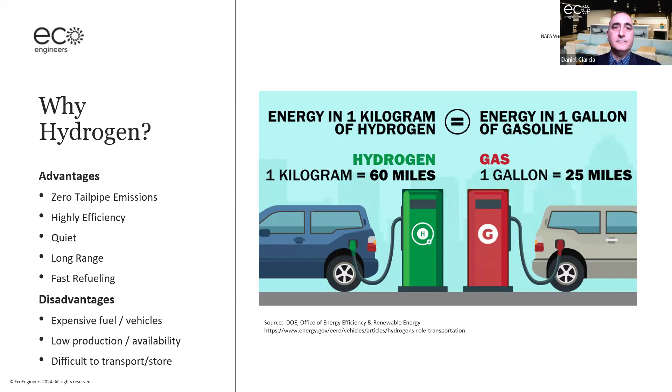So let's take a look at where we are today in the hydrogen market and where things are moving to. As you can see today, this is an NREL sourced chart, and the primary applications of hydrogen today are really for industrial uses, being used in petroleum refining and ammonia production. And those sources, frankly, how hydrogen is created today is quite dirty in most cases for these applications. Three-quarters of the hydrogen being produced today comes from fossil natural gas, and about a quarter of hydrogen today is produced from coal in a process called coal gasification.

So we want to look ahead at both the use of hydrogen as a clean vehicle source, but also how it's produced, because that's very important to solving the problems of climate change and emissions. Moving forward at the expected demand for hydrogen, the medium and heavy duty market will be the dominant consumer of hydrogen, as well as decarbonizing our natural gas pipeline by blending hydrogen into natural gas.

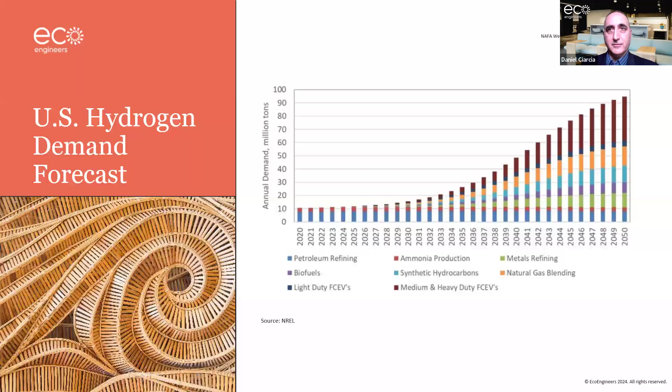But I'm using words like decarbonizing. How is hydrogen going to decarbonize these applications if they're made from very dirty sources today? That takes us to the topic of how do you measure the environmental footprint of this fuel and the production of this fuel. We know that using it is very clean, but how do we produce it in a clean way? You would first need to measure what that impact is of the hydrogen.

This is a process called a life cycle assessment, or life cycle analysis, or LCA for short. Essentially what an LCA does is it looks at all of the inputs to creating a fuel. What are those inputs of feedstocks? How are those feedstocks acquired? Are they grown? Are they harvested? Are they mined? How are they transported to a production facility where they get converted to the end fuel, which in this case is hydrogen?

And possibly are those byproducts being produced, and can those fuels be used within the system to clean up the actual production itself? So all of this is kind of within the boundary of what we would look at doing a life cycle assessment of producing hydrogen or any other fuel that needs to be measured.

At the end of the day, what we look at is to determine, in terms of greenhouse gas and climate change, the carbon emissions or the CI emissions of that fuel on a per unit of energy basis. So we're measuring how much emissions are emitted to produce a certain amount of energy in this process.

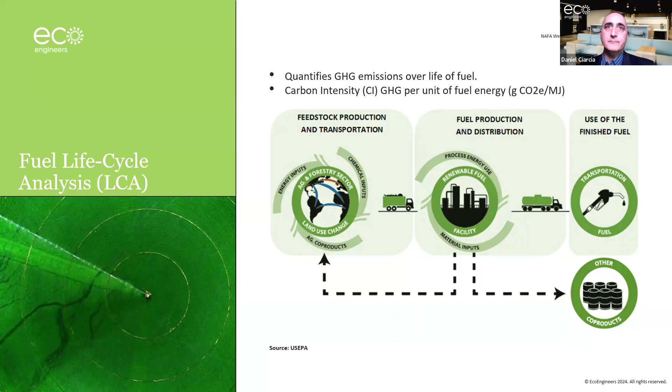Hydrogen today has kind of a high CI, or high carbon emitted model, a medium or medium-to-low model, and then a very low carbon intensity model. So that's where this concept of life cycle assessments really becomes important. It would be measuring these production facilities to determine how much carbon is actually emitted during the process of creating hydrogen.

The traditional and current method of producing hydrogen is pretty energy and resource intensive. This is the high carbon intensity model, where you're using a lot of energy to heat up methane in order to break the molecules and extract the hydrogen out of it. Methane is typically from fossil natural gas, and it is a process that requires a lot of energy and emits a lot of carbon in the process. So even though it's prevalent today, it's not the desired way of making hydrogen, and we can look towards improving that carbon intensity.

So the second model is to do essentially the same type of process, but to take any emissions that come off of that process and sequester those. Typically, sequestering means putting it underground in places where it will reside for at least 100 years. The hope here, of course, is that in 100 years, we will have solved climate change and it won't be a factor anymore. So this is a good intermediate step to cleaning the process of making hydrogen, or really any fuel type, by sequestering those greenhouse gas emissions underground.

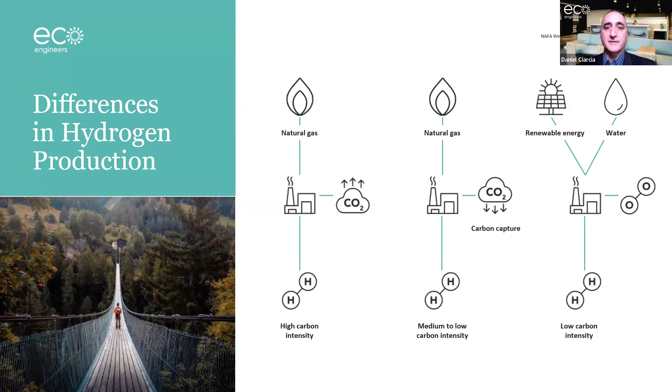Right now, there's a gap between what's available to do that clean hydrogen production and the demand that we expect to see for hydrogen. To close that gap, the Inflation Reduction Act that was passed, I guess a year and a half ago now, will address that production by providing tax incentives for those who are producing clean hydrogen. So you can see what these incentives look like based on the x-axis here, which is the carbon intensity.

Again, carbon intensity is derived from that life cycle assessment process. At EcoEngineers, we can support this process of analyzing a production facility to determine the carbon intensity. If it's low, the lowest bracket being less than 0.45 kilograms of emissions per kilogram of hydrogen, the maximum tax credit is available, and that's 60 cents per kilogram of hydrogen.

It tapers off pretty rapidly after that if you are higher than 0.45 in carbon emissions. You can see how it tapers off, and you can still get some incentives up until about 4 kilograms of CO2 per kilogram of hydrogen. The blue line there is a bonus that the IRA provides, basically a 5 times multiplier on that incentive program if certain conditions are met by the producer, such as prevailing wages and apprenticeship programs. So very compelling incentives available there.

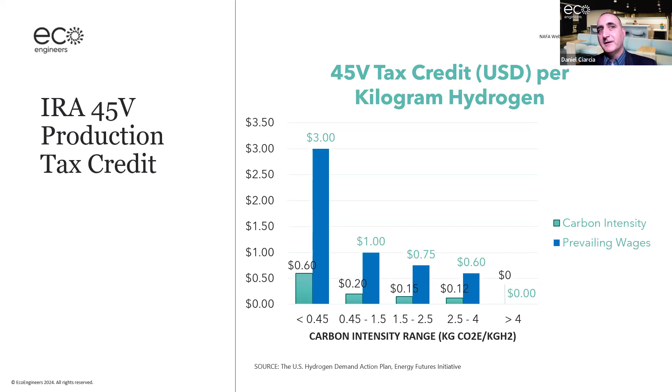With the last slide, I'll pull it all together to show how this can all be stacked to really provide a financial incentive for creating hydrogen in a clean way across the industry. This example shows an electrolysis plant that is using renewable energy, maybe from wind or solar, to provide electricity into the electrolysis process and create hydrogen that is used in vehicles.

Nationwide, through the Inflation Reduction Act, you would have the 45 credit available for production of the renewable electricity. You would also have the 45V available, which is a production tax credit for low carbon hydrogen, as shown in the previous slide. Those two incentives alone would probably be able to support about half the cost of making that hydrogen.

So that it really brings it within cost parity of our less desirable production methods today. In addition, some states, California shown here, have additional incentives available. California has an incentive for the hydrogen pump, having the hydrogen pump available, and also through a program called the Low Carbon Fuel Standard to dispense hydrogen in the state. These programs aren't necessarily restricted to California, but they are surely the most aggressive today across North America, although there are other regions with similar programs.

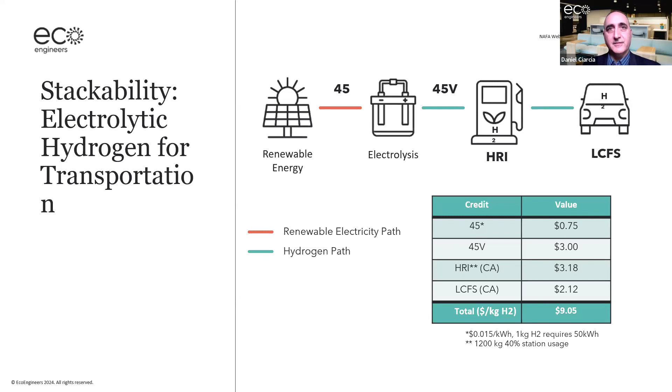So it is possible to stack all of these incentives and really offset the total cost of production for the cleanest of hydrogen sources. This will hopefully move the industry forward and really make the realization of having plentiful clean hydrogen available for vehicles in the short-term future.

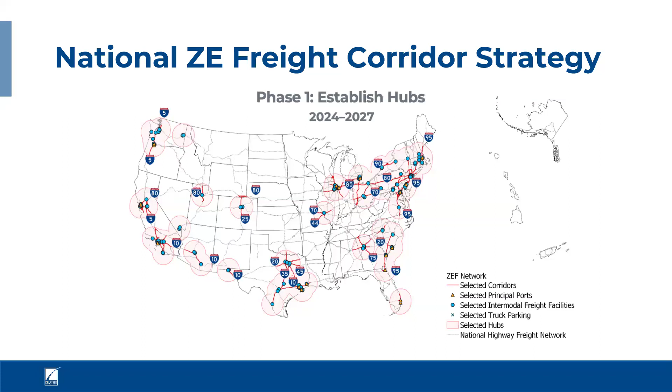The initial selection sites were based on states that already have policy in place, and places where there are already alternative fuel networks established. They also see ports as a key area for tying in, a great spot for initial adoption of ZEV technologies for medium and heavy duty, because it's already such a closed route—easier to get fueling in there, easier for pilot projects and to establish best practices. So all of our I-95 corridor is also tying into every port, and we're focused on every port between Georgia and the New York, New Jersey port.

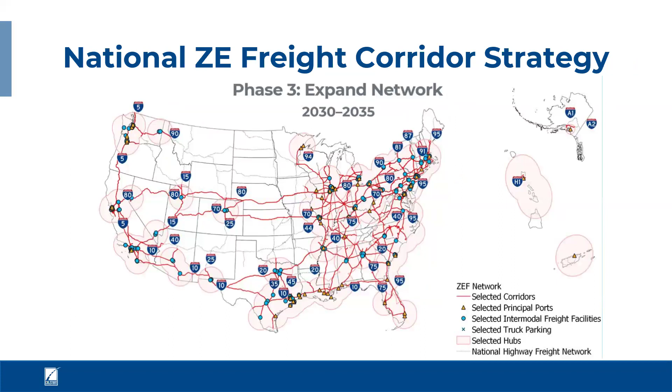So all of these are in the first phase and phase 2 level of what's drawn out here in the National Freight Corridor Strategy. This just goes on to show you how this planned expansion will look, for 2030 and 2035.

Next slide is the corridor as it's planned in its totality. So we've got a lot of inspirational work. Of course, this is not set in stone. Like I said, they plan to update this every year, and I'm quite sure there will be some iterations along the way and some best practices that wind up evolving. But it's exciting to see this begin its development.

So with the focus on the fact that the first wave of adoption will be in these hubs, and a lot of them will be focused at ports, I wanted to give some technology examples of what is available off-road, and hydrogen vehicles that are at ports.

So several of the key things that have been noted about battery electric vehicles, particularly at the ports, is that especially in the Southeast, there is an issue with temperature, particularly high temperatures. It gets rather hot down here and the range does not keep up. The batteries are not as efficient as they ought to be.

Also, over the course of the shift, ports are running continuously. Those vehicles really don't get much of a break, and the battery usage drops significantly over the course of a shift. And then you lose your payload over the course of the shift because the battery simply isn't able to operate as quickly and as efficiently as it was able to as it first came off the charger.

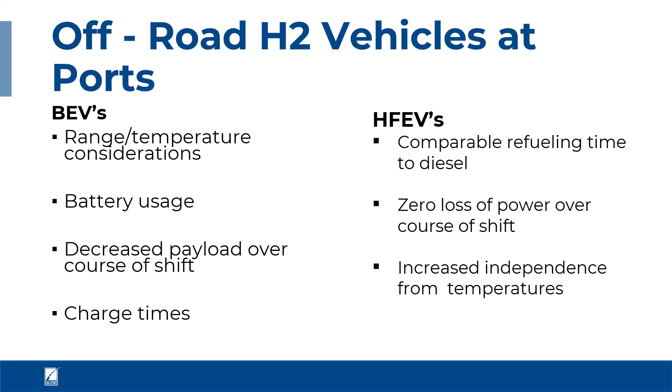One port that I've been particularly impressed with as far as looking at pilot demonstrations is the Port of Los Angeles. If you're looking at diving into this more, I highly suggest that you go to their website. There are a number of off-road trucks that are available in this space. However, a lot of them are currently being tested overseas, and I wanted to focus here on a few that were being tested right here in the US.

Port of LA happens to be doing a lot of testing. So I wanted to highlight this Nuvera Hyster handler. This is out of the Port of LA. Just want to give you an idea of the size of these shipping containers that are being used, and the length of the day and the temperatures that this thing is being used at. And it has great reviews, as you can see on their website.

Another is this Class 8 yard truck that was built by Capacity Trucks and utilizes Ballard Power Systems. Again, I highly encourage you, if you're interested in this technology, to go check out theirs.

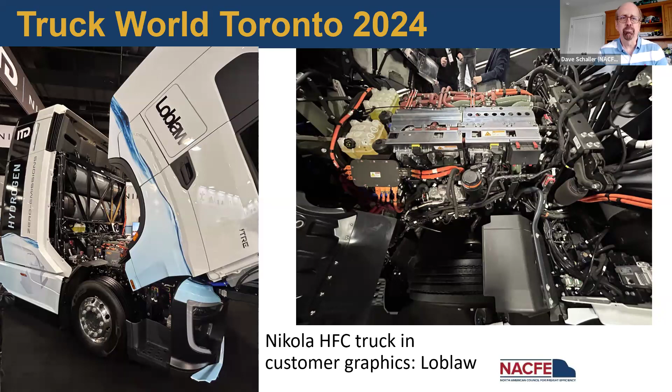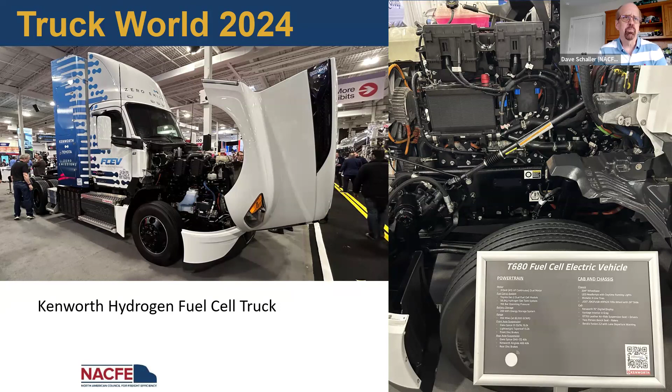Why is trucking so interested in hydrogen? That answer is fairly straightforward. The lime green box represents the capabilities of today's battery electric trucks, with ranges around 250 miles and 43,000 pounds. Once you start getting ranges much longer or loads much heavier, you need to look for other solutions, which might be hybrids, as shown in yellow.

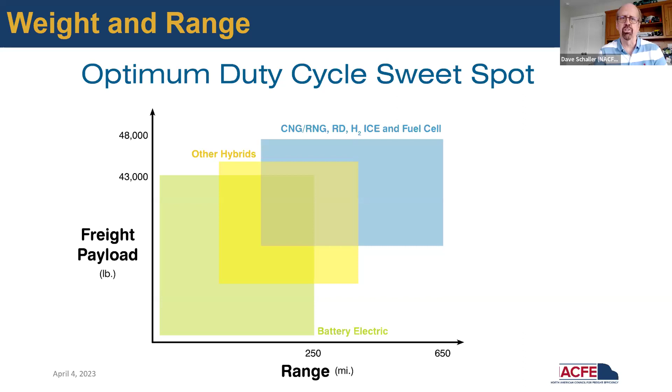For much heavier loads seen in Canada, Mexico, or even a little in the US, with much longer routes, many drivers can get up to 600, a little more than 600 miles—a really great day would be 650 miles. They need to look for a different clean fuel source. That might be renewable natural gas. There are many fleets looking at renewable diesel right now. But then we get into hydrogen, both as a hydrogen internal combustion engine as planned by Cummins, and hydrogen fuel cells as planned by Ballard, Cummins, and a whole series of others. That's all forthcoming, and I'll talk more about it, but it's that challenge of weight and range that battery electric can't handle today that really has the industry interested in what we can do with hydrogen.

I frequently get asked when I'm out in public, which is going to win—is it hydrogen or battery electric, Dave? Although much of the world sees them as competitors, I see them as teammates. Both hydrogen fuel cell trucks and battery electric trucks have rechargeable batteries, electric drive motors, high power cables, software management systems, and regen braking. So they have a lot in common.

What's different is that the easiest way to describe a hydrogen fuel cell truck is: if we start with a battery electric truck and remove roughly 75% of those expensive, heavy lithium-ion batteries, and replace it with a hydrogen fuel cell and hydrogen fuel tanks, we now have a hydrogen fuel cell truck. For those terribly interested in hydrogen, all the experience the industry is currently gaining with battery electric trucks is validating many of these components and getting them up to scale, and that all benefits hydrogen fuel cell truck development. Now, they both need new refueling systems and both have large electricity consumption. Actually, because of the inefficiencies of creating hydrogen and converting it back to electricity on board, hydrogen trucks will use more electricity than a battery electric truck.

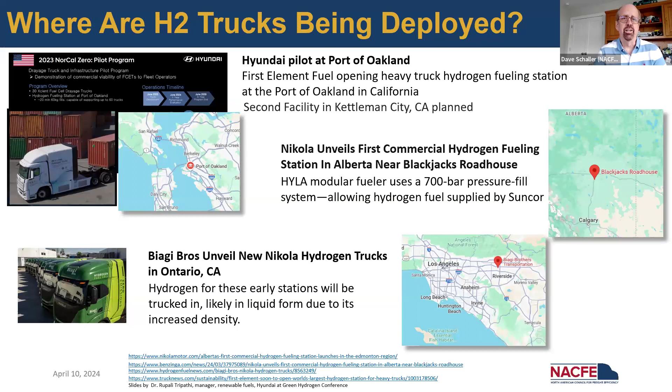What's really exciting, at least to me, is that we've just had the opening of First Element Fuels' Port of Oakland fueling facility. This new facility is servicing 30 Hyundai trucks, plus some of the Nikola trucks, like the one from a carrier that's moving intermodal containers with Nikola trucks. So this just opened. Now we have real world hydrogen trucks and a real world fueling station. These are all steps forward.

Keep in mind, we're at a very, very early stage of this. Battery electric trucks have been around for five to almost ten years in some cases. So we're catching up and building off of what's been done with battery electric trucks, and now extending it further with hydrogen.

We look at what's being done in the US and Canada of particular interest. A couple of really neat slides here you're welcome to reference later, looking at hydrogen electrolyzer locations and capacities, you'll see the Northeast and California area very heavily represented. But the $7 billion in hydrogen hubs that recently was announced covers Mid-Atlantic, Appalachian, Midwest, Heartland, Pacific Northwest, California, and the Texas area, all with money being spent to put hydrogen hubs into those areas.

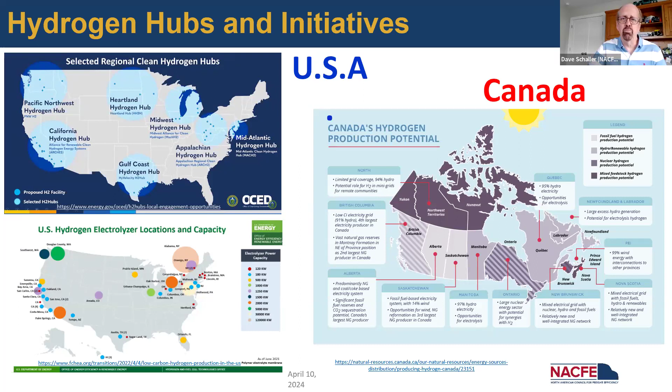If you're really interested in hydrogen, I'd encourage you, NACFE has a free report on hydrogen trucks: Are they long haul's future? Much as I've stated, we see hydrogen and battery electric trucks not as an either-or, but an and. Working together, they will support the industry. Hydrogen fuel cell tractors are the only zero emission solution for many duty cycles for heavy duty tractors, but there are also renewable natural gas, renewable diesel, and other things that'll help make all that possible. The trucking industry is still sorting out exactly what type of hydrogen and what pressures we're talking about. Will it be gaseous, liquid? What pressure levels will we fill at? So all of that is to be determined as we move forward.

NACFE is the organization that put out the report called The Messy Middle, which you can get at no cost by clicking the blue link. What we're recommending is that somewhere out in the future we're going to get to zero emissions vehicles, but here in the messy middle, we're going to be working with a lot of different solutions. There are about 20 different alt fuel combinations at play in the industry right now, with many people very dedicated to decarbonization.

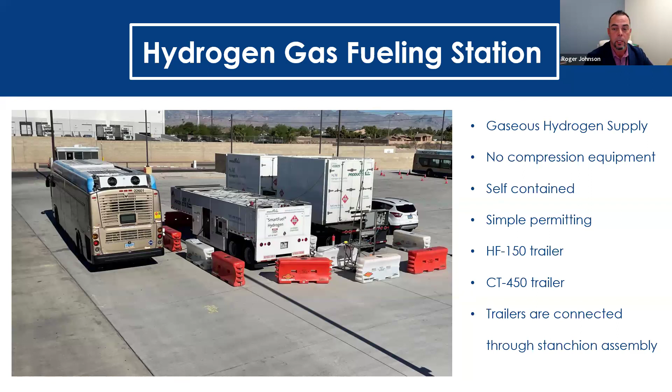Here's a closer look at the HF-150 trailer. The main intent of the smaller trailer is to provide the dispenser assembly and the controls. There isn't really a storage of fuel that we're using from this trailer. It acts as more of a pass-through, and it's just there for interfacing to the bus. The taller trailer behind this one provides the volume of storage. This small trailer stays on our property all the time, and it includes all the required signage, leak detection, alarms, and emergency shutdowns.

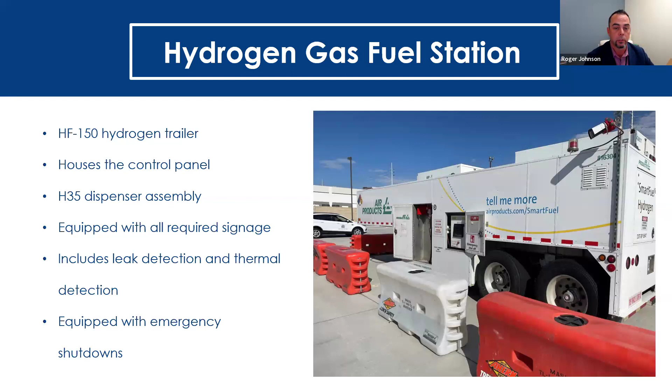This is a view of the stanchion assembly that plumbs the smaller trailer to the larger trailer. It's bolted to the ground and it's equipped with pressure gauges, a regulator, and a vent stack. As the storage in the larger trailer becomes depleted from using the fuel, this plumbing can easily be disconnected for a new trailer to be exchanged.

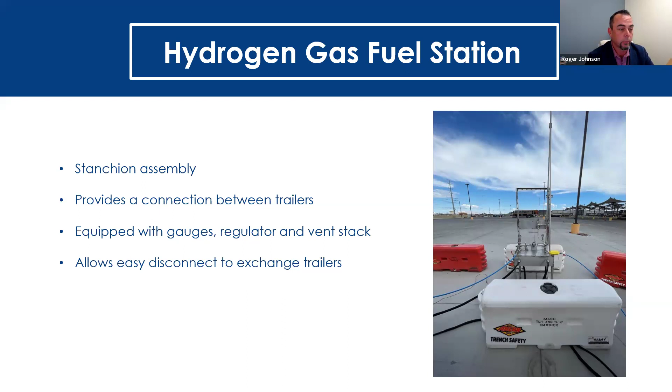This is what the controls and the dispenser look like on the trailer. The control panel requires very little power. It's done with only a 12-volt battery and a solar charger that are both incorporated into the trailer. The fueling process is really straightforward, and it's similar to our CNG fueling process. After powering the control unit on, it prompts you of all the required steps, including grounding the vehicle. It auto reads the pressures and records the transaction. The amount of time that process takes can vary depending on how much fuel is in the trailer and in the bus, but typically it's about 30 to 40 minutes. We are expecting hydrogen fueling time to match our CNG fueling when we have the full build out of our liquid station. Next slide, please.

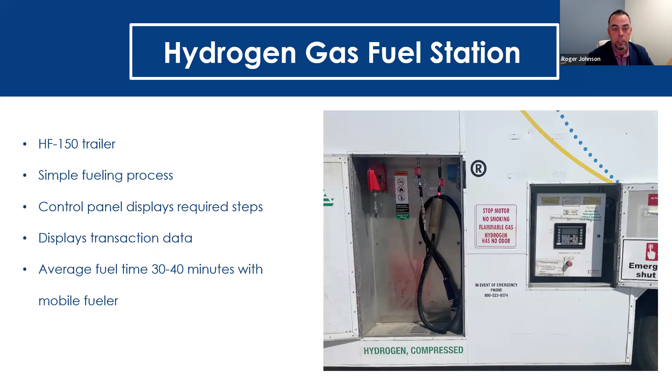As the fuel station assembly was completed, we performed training with the manufacturer, Air Products, to educate and inform the fueling staff, the maintenance team, safety and security, and we even invited the fire department just to have them comfortable. In addition to training for the fuel equipment, we also perform specialized training from the bus manufacturer, New Flyer, and Ballard, the fuel cell manufacturer. Some of that training we even perform before the buses arrive so that maintenance feels comfortable, and we're continually performing training to this day. We're also talking with a local community college to help develop curriculum and programs to help introduce these new technologies to the future workforce.

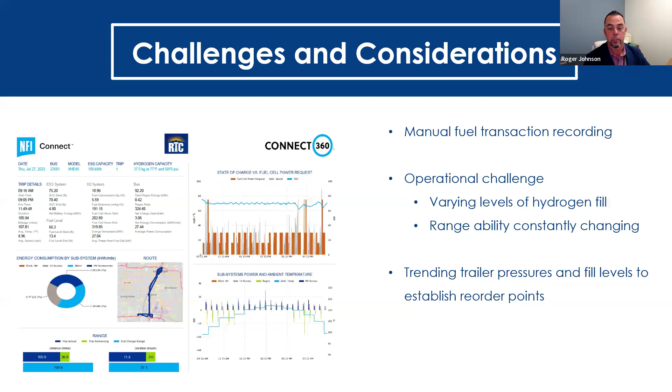For a brief look forward, we are continuing construction of our liquid hydrogen station that will support up to 15 buses. That should be completed by the end of this year, maybe the beginning of 2025. We have 22 more 60-foot hydrogen buses on order with New Flyer, 7 for delivery at the end of this year, and 15 more the following year. We're also working with our engineering team to design a second phase of liquid hydrogen fueling infrastructure that will support up to 50 buses, and we're working on a scope of work for the supply of liquid hydrogen fuel.

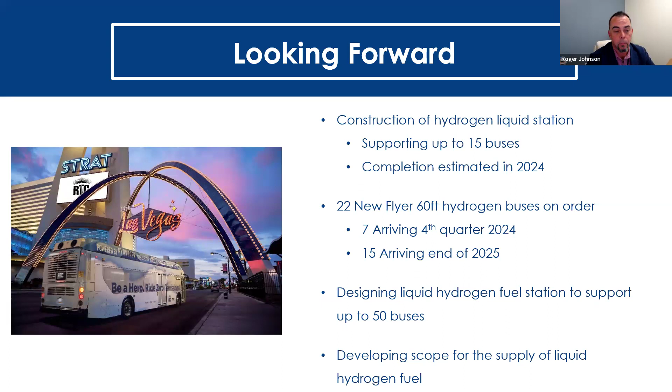In summary, while we didn't plan on using this temporary gas solution, as we moved forward we recognized there was going to be a gap in timing between our liquid station and bus arrival. This was a great solution to support our first 2 buses. Although there's a bit of a manual process and some inconsistency with how much you can fuel a bus, it has allowed us the ability to put buses in service, gain operational experience, and perform training. That's all I have prepared to share, and I look forward to any questions at the end.

Back to you, Shelley. Thanks, Roger.

Really appreciate you sharing your lessons learned and the growing pains as well as the advantages of going with hydrogen in your new fleet. Next up, we are heading back to California.

Roland Cordero is Foothill Transit's Director of Maintenance and Vehicle Technology. He's responsible for procuring, deploying, and ensuring the maintenance of transit vehicles and all related technology. Roland has 21 years of experience in the transit industry in varying capacities from finance, operations, facilities, and fleet maintenance. He's been involved in the deployment of Foothill Transit's electric bus project and full electrification initiative since 2010, a proud alumnus of the Leadership APTA Executive Development Program and Eno Transit Senior Executive Program. He also earned a certificate in FTA Environmental and Sustainability Management from Virginia Polytechnic Institute and State University.

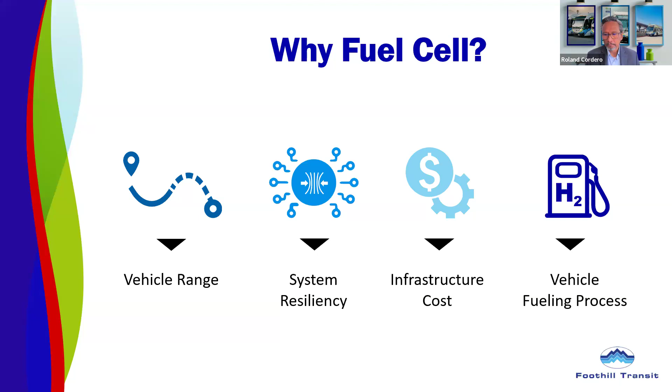How did we start our project with fuel cell? We're not fuel cell experts, and we've never operated fuel cell buses before. So we hired a consulting firm to help us plan our approach into a fuel cell program.

Our scope of work included developing a hydrogen fueling station plan. What size of fueling equipment do we need to fuel our buses at our service facility? We looked at joint use of the fueling facility, meaning today we have a public access fueling facility, but we found during the analysis that there wasn't really much demand for private use, for vehicles to fuel their hydrogen fuel cell cars. They also helped us find appropriate grants to support our project, and all the other items listed here.

Required procurement: first off, obviously, you're going to need a hydrogen fuel cell bus. Instead of issuing a request for proposals for hydrogen fuel cell buses, we purchased our buses under the California Department of General Services state contract. It's much easier that way to purchase a bus instead of going through an entire procurement process that could take almost a year to award a contract.

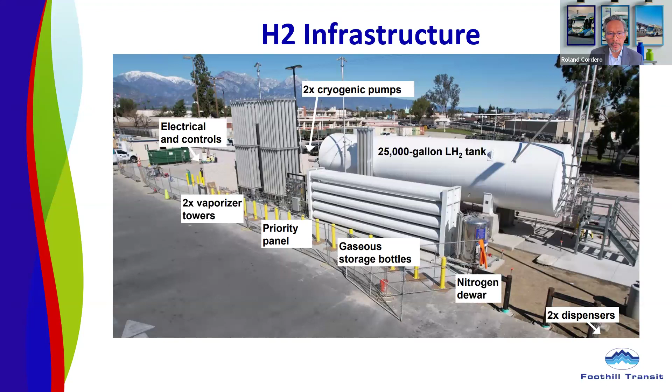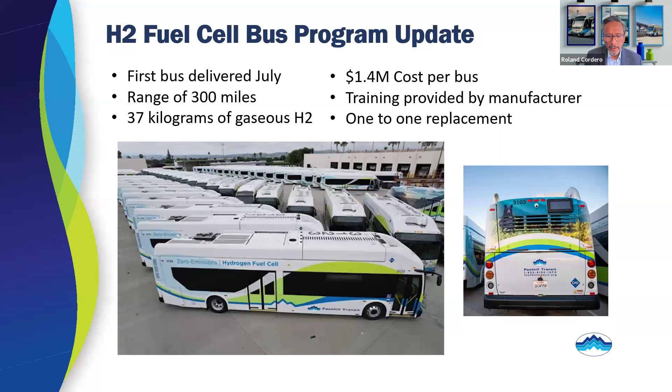June of last year, we were able to commission our hydrogen fueling station. Our plan was to fuel 18 buses as fast as we could. So what we were able to do was fuel 18 buses within an hour and 30 minutes. That's 90 minutes of fueling hydrogen buses.

The fueling process: the dispenser can fuel up to 5 kilograms a minute, and we average about 9 to 10 minutes of fueling per bus. If you compare that to a battery electric bus, fueling 18 of those would take you hours and hours. So this was a great process, and we were able to fuel those buses quickly.

Next slide, please. Up and coming projects: we recently awarded a contract to a consultant to help us develop a hydrogen fueling station at our Arcadia facility. We also recently signed a contract with New Flyer for 19 additional hydrogen fuel cell buses.

We still see a possibility of operating battery electric buses. That's why we recently purchased 12 double-deck battery electric buses with Alexander Dennis. These are Buy America compliant buses with a range of 300 miles. The proposed plan is to develop a battery electric bus with 700 kilowatts of energy capacity. So we're looking forward to these new projects as we move forward with our transition plan to a 100% zero emissions fleet. Next slide, please. I think that concludes my presentation.

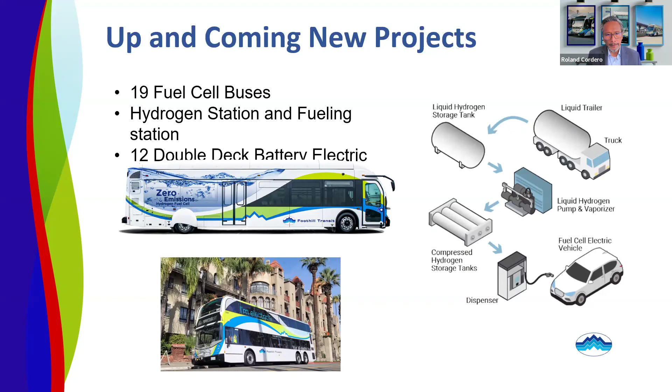I'd be more than happy to answer any questions you may have. Thank you.